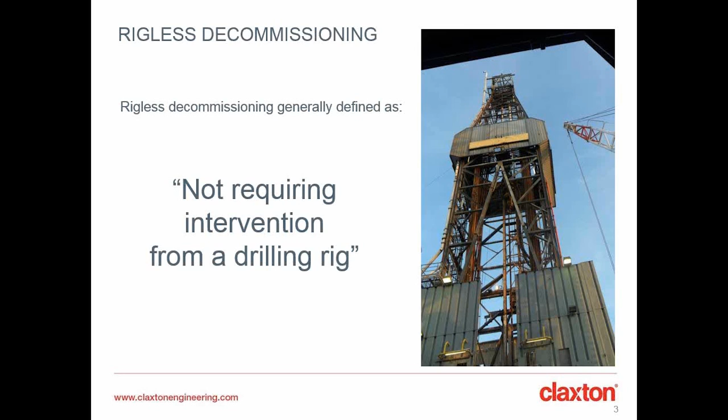So what is rigless decommissioning? Not requiring intervention from a drilling rig. Obvious really. However, what people are not aware of is that Claxton were involved with the world's first ever rigless platform well abandonment campaign on the Esmond, Forbes and Gordon fields over 20 years ago.

At Claxton, rigless well abandonment encompasses both platform-based wells and subsea wells, for which we have extensive experience, proven across multiple offshore campaigns since the days of Esmond.

For both types of well, a drilling rig is not required to be brought in. For platforms, Claxton can provide our bespoke modular recovery system and work platform, which can be tailored to suit the particular deck layout of the installation. Whereas with subsea wells, we operate from the deck of an anchor handling tug supply vessel or light construction support vessel. It is worth noting this is a general overview of the stages involved.

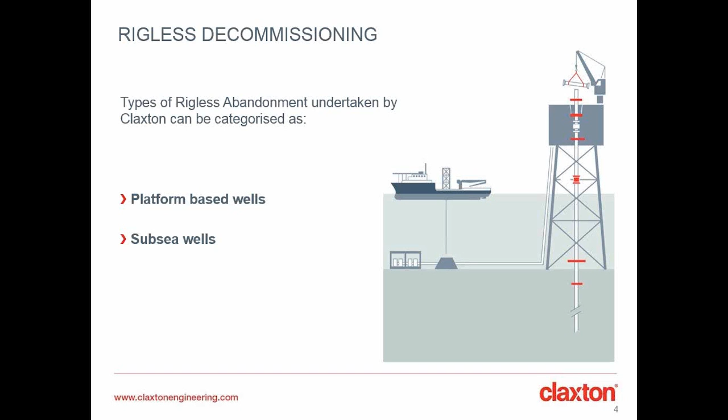Each well abandonment program would be fully assessed on a case-by-case basis, and it's also assumed that the well is not live and has been plugged at the reservoir in accordance with industry regulations. So what are the typical stages of platform well abandonment?

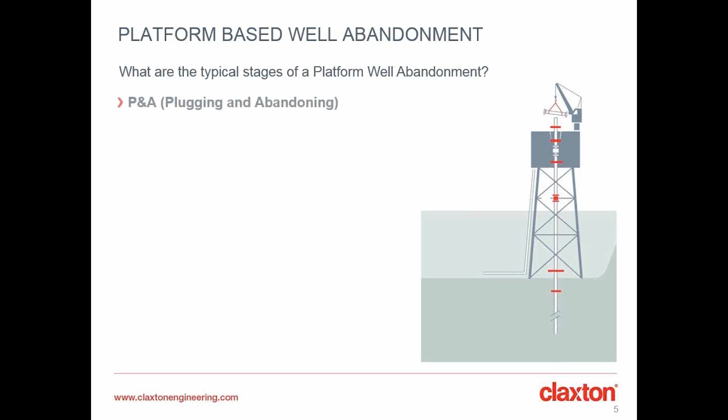P&A. So if remaining intermediate or surface plugs are required, Claxton can assist with the tubing cut and recovery, and then move forward with the perforation of the casing strings, flushing of the well, and subsequent cementing operation. The integrity of the cement plugs will be verified by pressure testing.

Wellhead preparation. The Christmas tree can then be removed along with the annular wing valves. The tubing bonnet would then be removed so that a sacrificial joint that we can provide can be bolted on top of the wellhead. This will allow us to grab onto the wellhead for severance verification and the recovery stage.

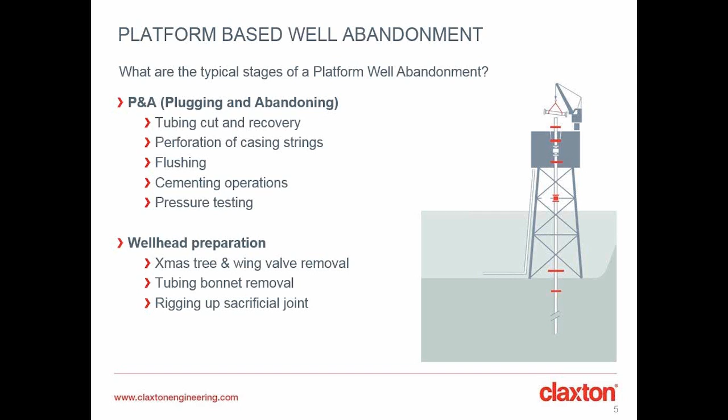Severance. For the severance and recovery phase, Claxton will construct our recovery system on the deck of the installation. It is made up of a brace pair of spreader beams which span the main skid beams of the platform, onto which is positioned the work platform, which has a false rotary table.

4 hydraulic cylinders are suspended from the work platform, from which is hung a Claxton proprietary tension ring. The combined pulling capacity of the hydraulic cylinders is 200 tons, which is more than enough capacity to deal with the majority of the wells that we encounter.

The well will be severed typically between 3 and 5 metres below the mudline, and be achieved through the deployment of Claxton's Sabre abrasive slurry jet system, which will cut the well from the inside out. Sabre utilises high pressure water, which is mixed with garnet.

The high pressure slurry is pumped down hole to a hydraulically controlled cutting manipulator, where the high pressure slurry is accelerated to transonic speeds within the cutting nozzle to form the cutting jet, which slices through metal and cement with ease. We have a range of cutting manipulators available, which can be deployed in casing sizes as small as 6 5/8 inch.

The Sabre system can cut through multi-string wells up to and including 30-inch conductor. And Sabre is also very effective at cutting wells with eccentric casing strings, more so than traditional cutting methods such as knives.

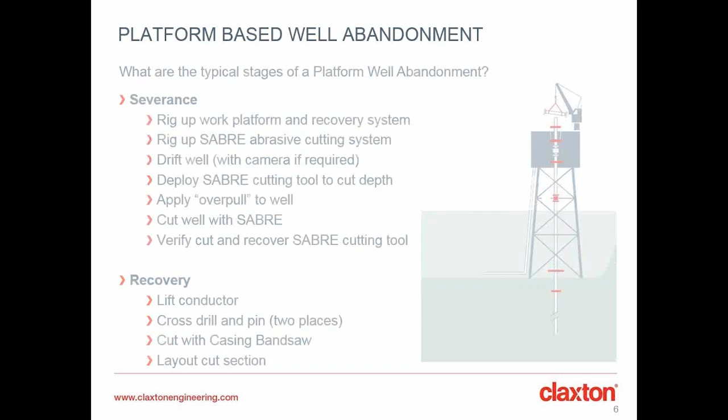Okay, let's have a look at a case study. This is for the Camelot Alpha platform in the southern North Sea.

The operator required a rigless approach to abandon wells on a normally unmanned installation. The self-skidding recovery deck was modified to suit the limited deck space. It saved time moving between wells as it could be moved under its own power.

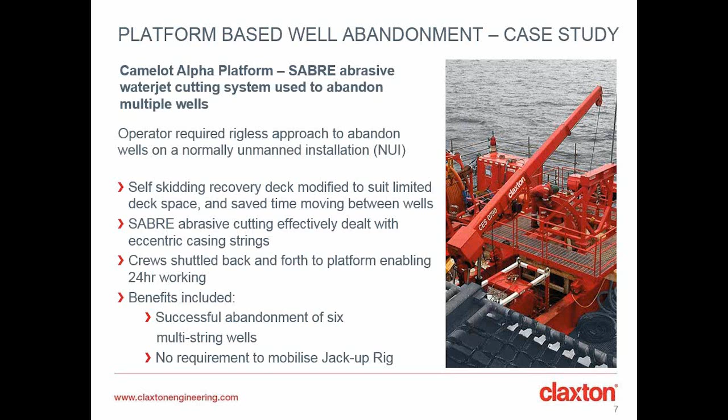The Sabre abrasive cutting effectively dealt with the eccentric casing strings, and crews were shuttled back and forth to the platform, enabling 24-hour working. Benefits to the operator included successful abandonment of 6 multi-string wells and no requirement to mobilise a jack-up rig.

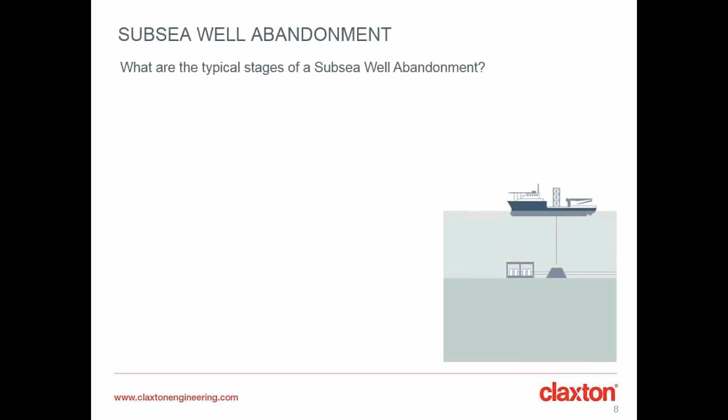I would now like to cover subsea wells. So what are the typical stages of a subsea well abandonment?

Firstly, there will be the temporary abandonment, or TA cap removal. The TA cap will have to be removed in order to gain access to the wellbore.

This can simply be a cap covering an H4 connection of a subsea wellhead, which would typically be removed by the vessel's crane with assistance from the ROV.

Or, with the mudline suspended well, the TA cap would be screwed into the first casing hanger. For this type of cap, Claxton would deploy its temporary abandonment cap removal tool.

This tool is deployed from the vessel's crane and lowered into the well until it lands onto the TA cap and the top of the conductor.

The tool is then operated hydraulically, rotating its spindle, which backs out the TA cap, which is retained for safe removal up to the surface. This particular tool can be extended to recover caps 30 metres below the top of the conductor.

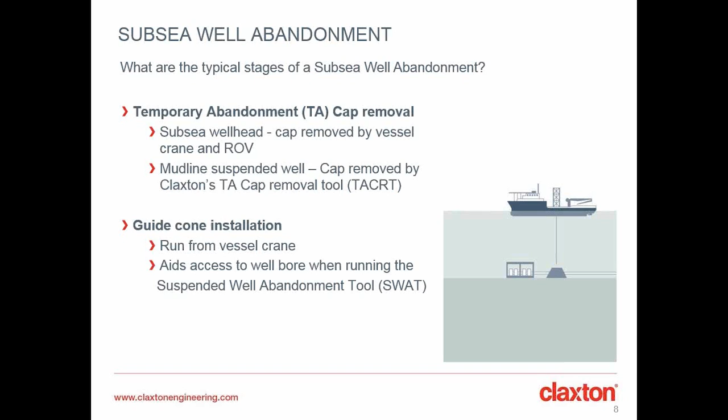We would then install a guide cone. This would be installed onto the wellhead and ensures ease of access when running the Claxton suspended well abandonment tool, or SWAT as it is known, into the well bore.

P&A. For the casing perforation and cementing operation, SWAT is utilised. This award-winning tool provided an alternative to using rigs for the abandonment of subsea suspended wells since it was first deployed in 1996. The system permits perforation, circulation and cementing of multiple casing annuli whilst maintaining appropriate pressure control barriers.

With 2 sets of inflatable packers and casing perforation guns, this tool can isolate, flush and cement individual well annuli. The SWAT tool is also able to verify the integrity of the cement plug by pressure testing. This is done all within the same deployment.

The tool was recently upgraded with an extension module which enabled the setting of deeper cement plugs. In a recent campaign, the lowest cement barrier was displaced to 2,400 foot, or 730 metres below the mudline.

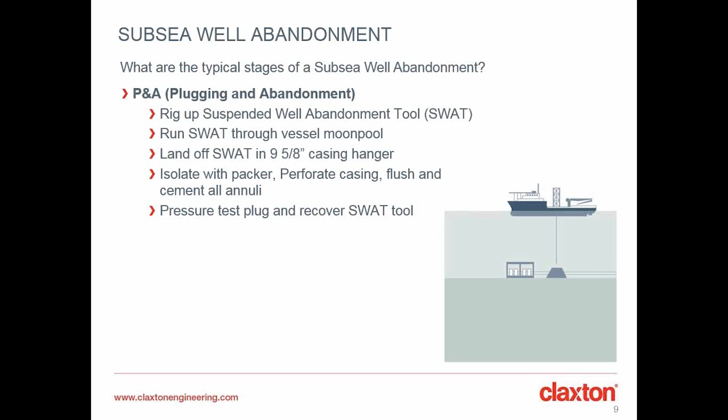I would like to mention that the SWAT extension module was developed and designed by Claxton's own R&D department and was manufactured on extremely fast turnaround, which is an excellent example of how reactive and innovative Claxton is as a company.

Severance and recovery.

For the wellhead severance, Sabre abrasive waterjet system is utilised. It is deployed in conjunction with our wellhead recovery tool, which is clamped onto the wellhead, whether it's a mudline suspended or subsea, into which the Sabre cutting manipulator is landed off.

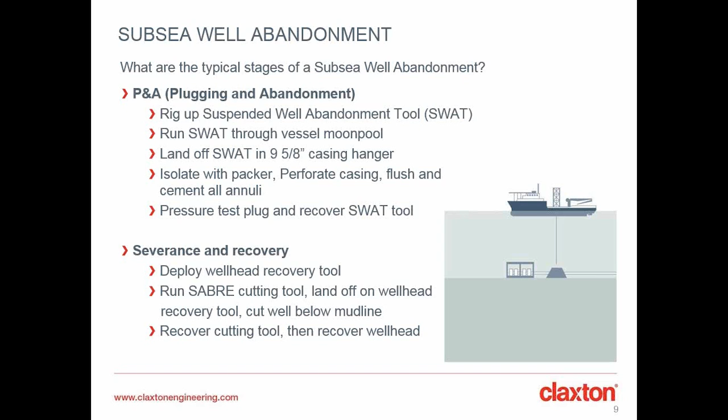The cutting depth is again determined by industry regulations and is typically 3 to 5 metres below the mudline. Before cutting, an overpull is applied to the wellhead for cut verification purposes. And when the cut is completed, the cutting manipulator is withdrawn and the wellhead is pulled out of the seabed and recovered up to the surface.

Okay, let's look at a subsea well abandonment case study. This is for a recent campaign last summer. It was a multi-operator abandonment campaign in central North Sea for Centrica and Antrim Energy.

10 Cat 1, 2.1 and 2.2 wells were abandoned with this rigless method. As I said earlier, the new extension module enabled plugs to be set 2,400 feet below the mudline.

The benefits of using SWAT include fast transition times between multiple wells on a single campaign. Typical well intervention times were between 36 and 60 hours. And by having a multi-operator campaign, it offers the ability of sharing project costs.

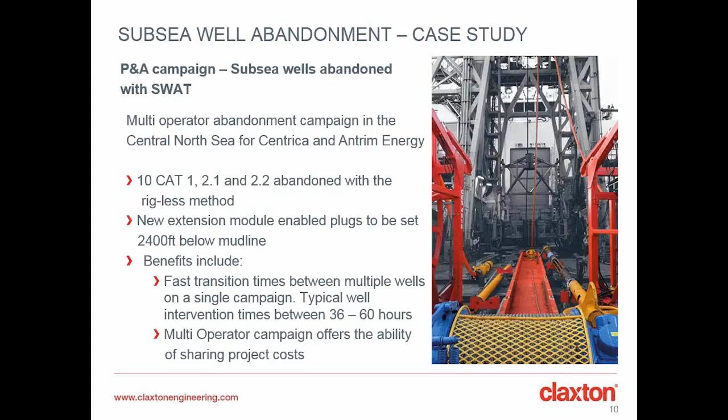So now I'm going to cover rig-based abandonment. So what's involved?

In some instances, the rigless approach for platform well abandonment is not appropriate. As a platform, for a number of reasons, the installation might just be too small, or the structural integrity might not be sound enough for the deployment of the required deck equipment, or the crane capacity could have been reduced to such an extent that handling equipment would have been impossible.

In these cases, the decommissioning activities would have to be carried out using a drilling rig. The process of the actual well abandonment is similar to what was described for the platform-based decommissioning, but with the advantage of having the availability of a drilling derrick.

So the first stage will be the P&A. The plug and abandonment phase will be done by the rig. This will often involve section milling of the casing to ensure a rock-to-rock cement plug at the reservoir and the intermediate, and possibly surface barriers as well.

Claxton will liaise with the client to ensure that the cutting and recovery equipment is ready and can be mobilised quickly to fit in with the P&A schedule to minimise the possibility of any downtime incurred by the rig.

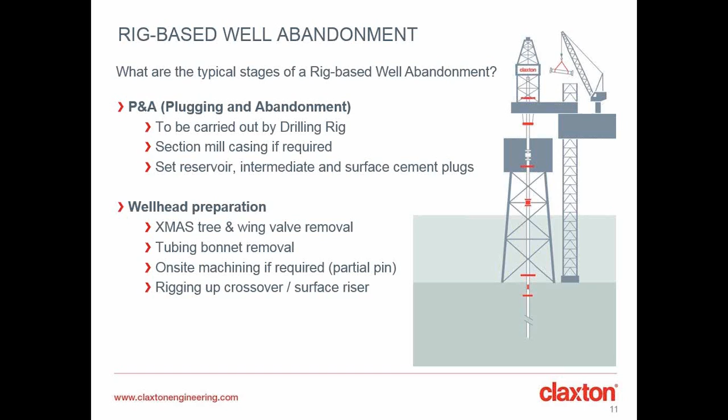The severance phase. The cutting operation is the same as previously discussed for the rigless abandonment, other than the well being pre-tensioned by the rig. It is worth mentioning that the Sabre is a modular system which can be adapted to suit most deck layouts, and it's also been designed with speed of assembly in mind in order to save costs.

Once the conductor has been cut, it is then picked up via drill pipe with a Claxton riser handling tool, and when the wellhead is up past the rotary table, the conductor is held in slips before being drilled and pinned and cut with a bandsaw.

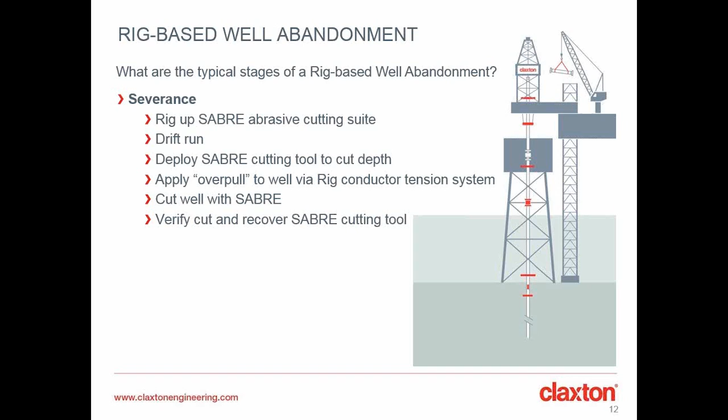Before the first recovered joint is laid out, link bars are then attached to the pinned conductor and shackled to the bails, and the conductor is then lifted for the next drilling and pinning operation to commence.

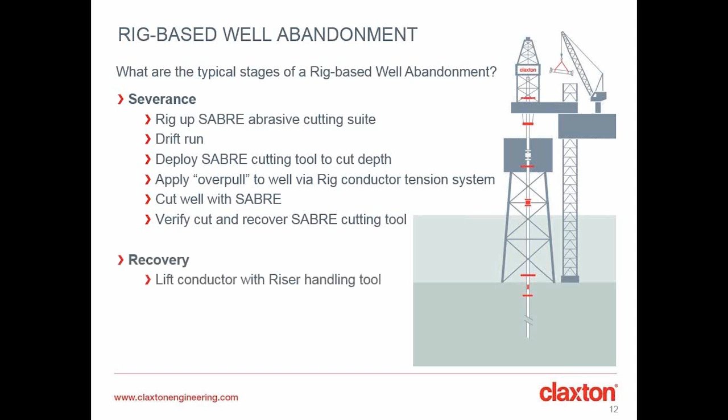Okay, let's look at a rig-based abandonment case study. This was a multi-platform well abandonment program in the southern North Sea. The operator had a requirement for a large number of wells to be abandoned across multiple platforms using a jack-up rig.

Claxton supplied services included wellhead deconstruction, surface riser assembly with crossover spool, tension ring, on-site machining on wellhead, Sabre abrasive cutting, conductor pinning and cutting equipment.

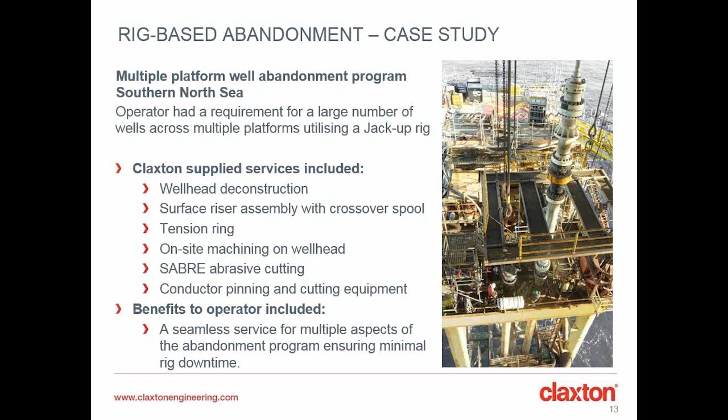The benefits to the operator included a seamless service for multiple aspects of the abandonment program, ensuring minimal rig downtime.

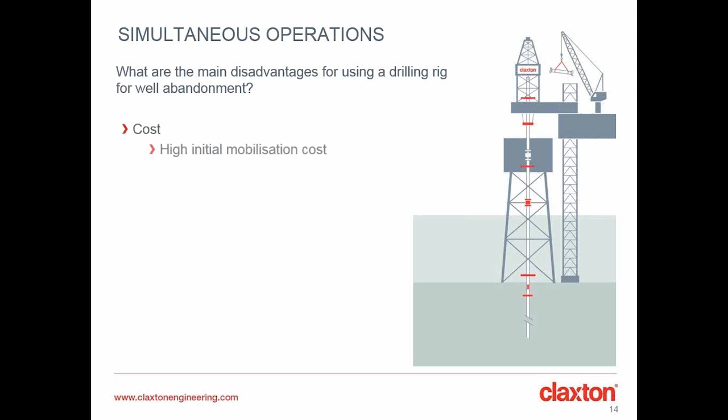Okay, simultaneous operations. So what are the main disadvantages of using a drilling rig for well abandonment? The disadvantage of using a drilling rig is primarily cost. This can be from a high initial mobilisation cost or day rate, and also the critical work path of the rig always involves using the rig floor.

And it's also time consuming to skid the drilling package from well to well. So at Claxton, we asked the question: what if we removed operations not specifically requiring the rig floor?

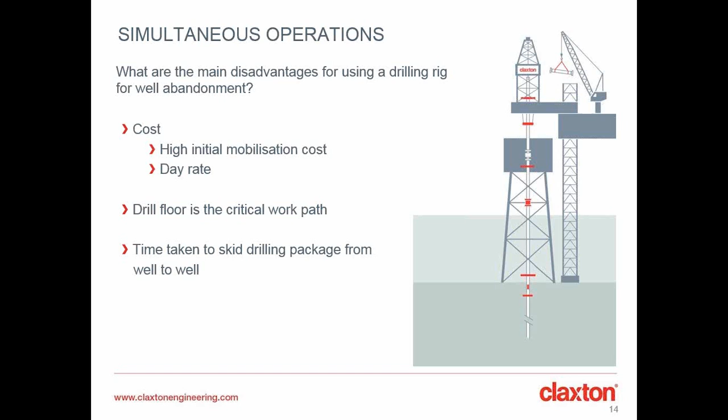Using a hybrid approach, utilising the rigless recovery frame and work platform on a multiple well installation would give us access to offline wells to perform non-critical operations such as wireline activities.

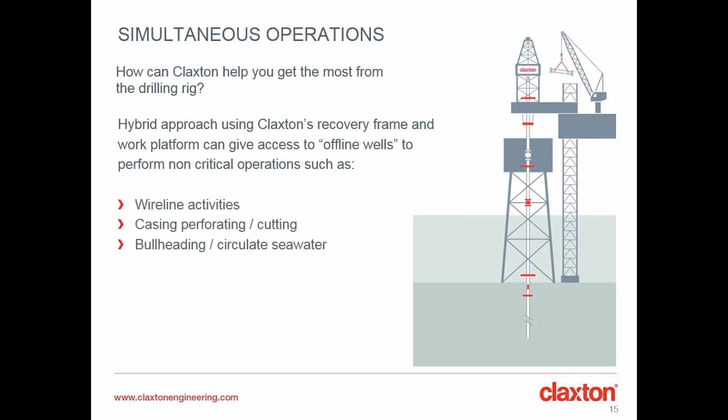Casing perforating and cutting, bullheading, circulating seawater, circulating cement, Christmas tree and wellhead work, pressure testing, cement bond logging, and tubing pulling.

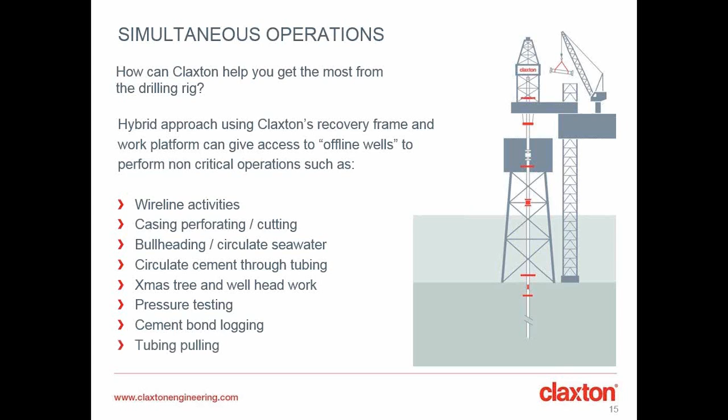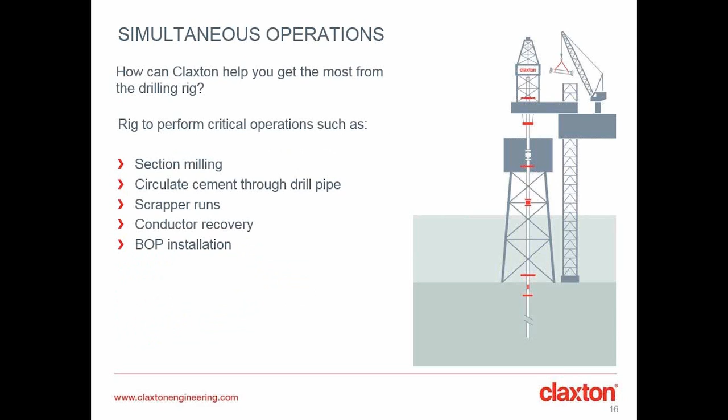So whilst these have been undertaken from our work platform, the drilling rig can focus on critical operations such as section milling, circulating cement through drill pipe, scraper runs, conductor recovery, BOP installation.

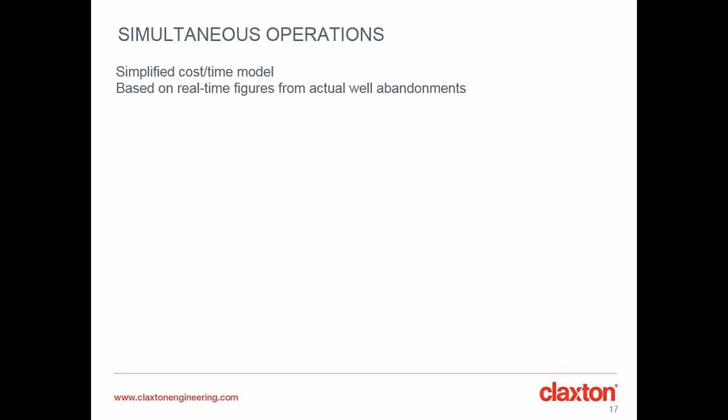Okay, to work a simplified cost-time model, Claxton have used a client's well program with real-time figures from an actual abandonment of the well. The actual data shows a total time of approximately 400 hours per well.

And with the Claxton proposed work split, this equated to 300 hours, which could be completed by either the rig or Claxton work platform, or 100 hours solely by the rig.

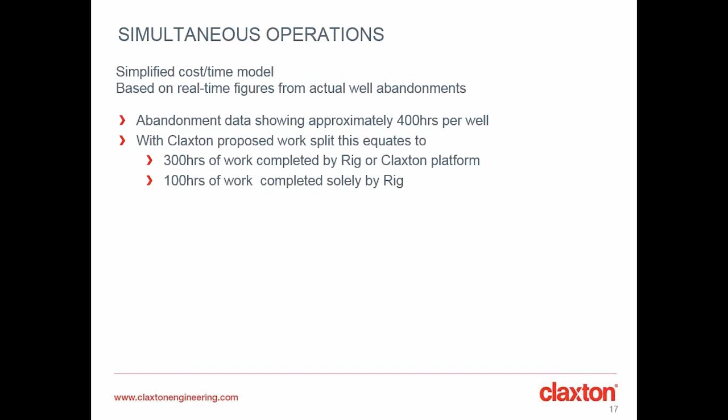With the correct work scheduling, we believe a time saving of 38% may be achievable.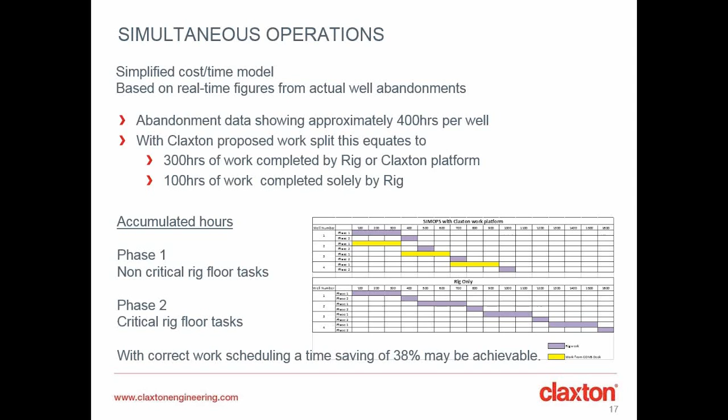I have covered quite a lot today. I just wanted to summarise the benefits of working with Claxton. We have extensive knowledge and experience of well decommissioning projects around the world. Our tools and processes have defined rigless and rig-based decommissioning and have a proven track record.

Claxton have continually invested in our team and proprietary tooling, with the result that today the company has completed over 280 cutting and recovery projects, over 85 wells cut, and over 130 suspended wells abandoned.

We define our unique offering as one that considers best practice that can be applied to different stages of the decommissioning process, with a complete service from the P&A, wellhead deconstruction, abrasive severance and conductor recovery.

We are also able to draw from interconnected disciplines from across the Acteon group of companies and third-party partnerships for specialist analysis work and manufacturing and machining where required. This enables us to define a full service offering for projects on a case-by-case basis, looking beyond immediate short-term efficiencies and thinking more strategically of ways to reduce costs in the long term.

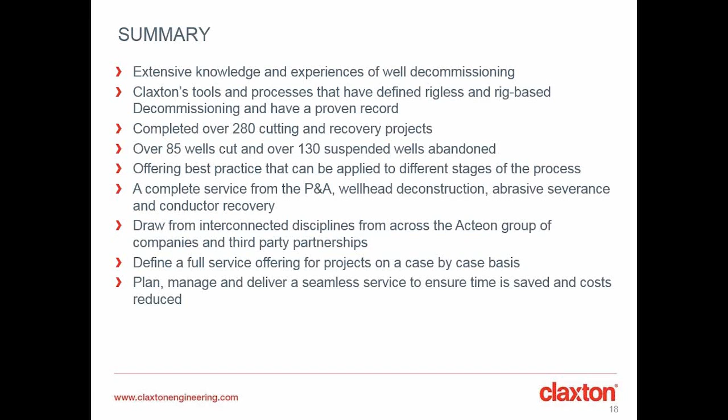We look forward to helping you with your decommissioning project very soon.